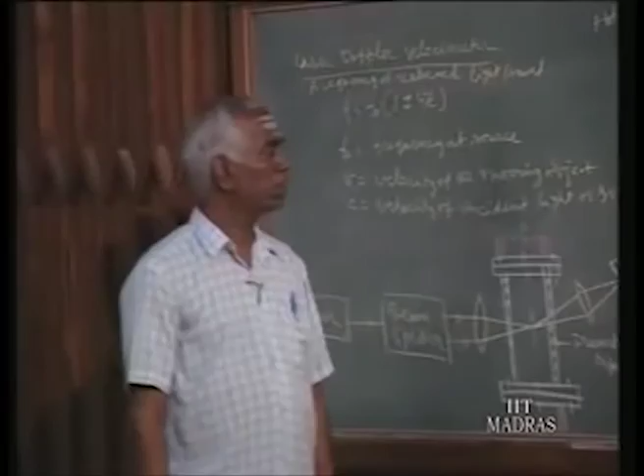Yesterday we saw the hot wire anemometers in 3 modes of operations: constant current mode of operation. This is a hot wire anemometer where we have this wire here. This is the wire of few microns diameter, taken inside, with connections given inside. This wire is used to sense the flow.

We saw 3 modes of operation. One is constant current mode of operation, constant temperature mode of operation, and another one is automatic adjustment with automatic control, that is with feedback. This is what we saw yesterday.

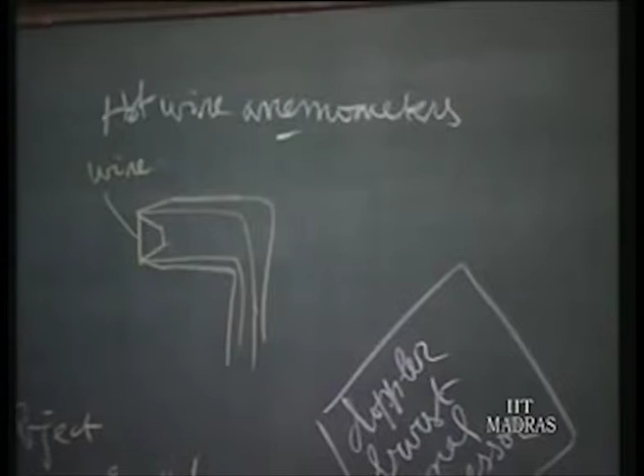In maintaining such hot wire anemometers, one is supposed to clean this wire periodically. Otherwise, what will happen? The dust carried by the flue gas will get deposited, and we will find the heat transfer coefficient H affected. We saw yesterday the equation I squared RW is equal to H into A into TW minus TG.

That is the heat transfer equation. That factor H is affected if you allow the dust to accumulate on the wire. So what is to be done is it should be cleaned periodically so that the calibration curve is valid. We also saw the calibration curves.

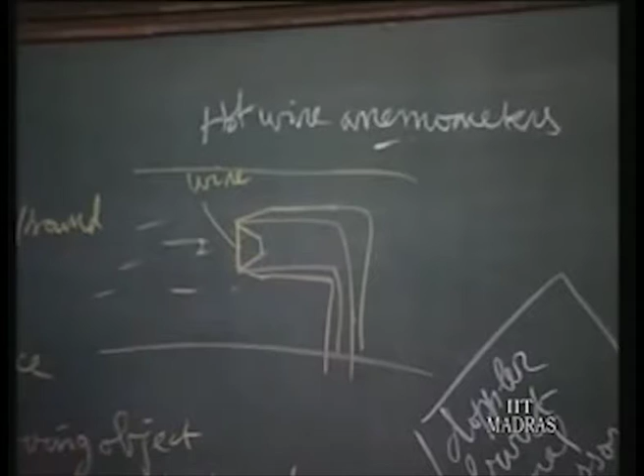In doing so, since the wire is so thin and short in length, it may break while we handle it. Or if the gas flow in the pipe contains some hard particles, due to high velocity, when the hard particle hits the wire it may also break.

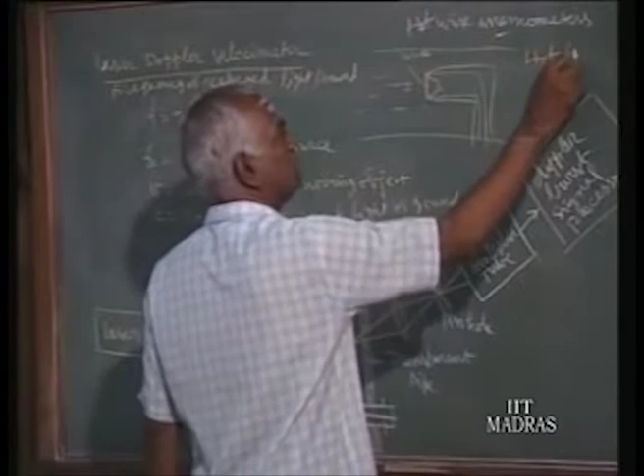So in order to avoid this problem, what is done is people nowadays use a hot film anemometer instead of a hot wire anemometer.

Here they take a wedge type glass, made up of glass support. Instead of keeping a wire, they paste on both sides. This is a wedge type, and they paste the wire material, depositing the wire material on both sides of the wedge, and then take the wire.

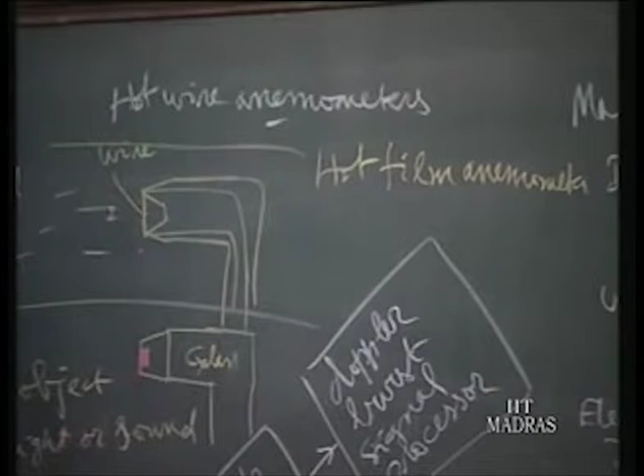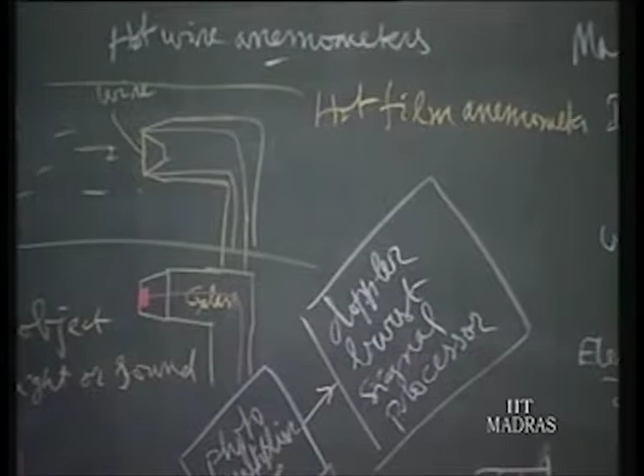This is a front surface, and from the back surface another wire will be taken. So now it's a hot film anemometer - instead of wire, we are using hot film. Now it is supported on the face of the glass support, so naturally the breakage is eliminated. This is the advantage of hot film anemometer over hot wire anemometer.

So now we pass on to the next method, that is the laser Doppler velocimeter. Here one can use either sound or light. The principle is making use of the Doppler effect.

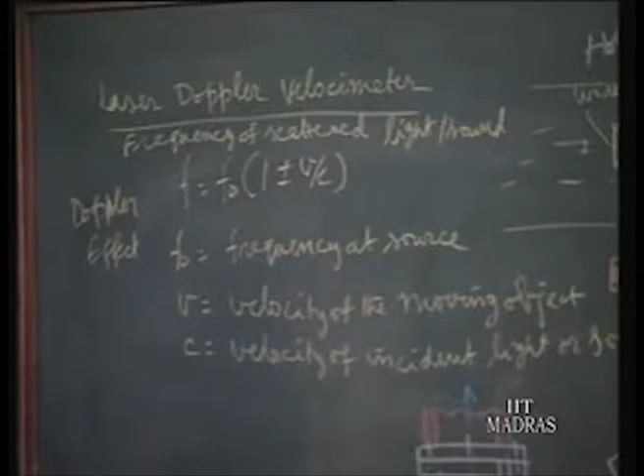What is Doppler effect? Doppler effect states the scattered light from any moving body contains the information about the velocity of the body. So that scattered frequency will be different from that at the source. That is the Doppler effect - the scattered beam contains information of the velocity, expressed in terms of the equation for frequency of scattered light or sound.

We can also use either sound or light for this measurement. So f, the scattered frequency, is equal to f0, the frequency at source, times 1 plus or minus v by c, where v is the velocity of the moving object and c is the velocity of the incident light or sound, whatever we are making use of in a particular instrumentation.

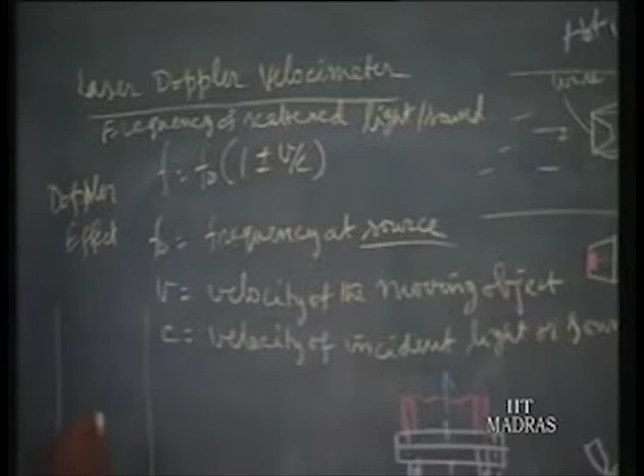We use plus when the object is moving towards the source. This is the source from where we send a beam. So if the object is moving towards the source, we use plus, and when the object is moving away from the source, we use minus. For example, this Doppler effect is used for identifying racing cars.

Suppose the police officer is standing here and he sends a light source or laser beam and collects it back. So this is going away from the source. By collecting this reflected light or laser, he will find out what is the speed, whether it is more than the allowed speed on the road.

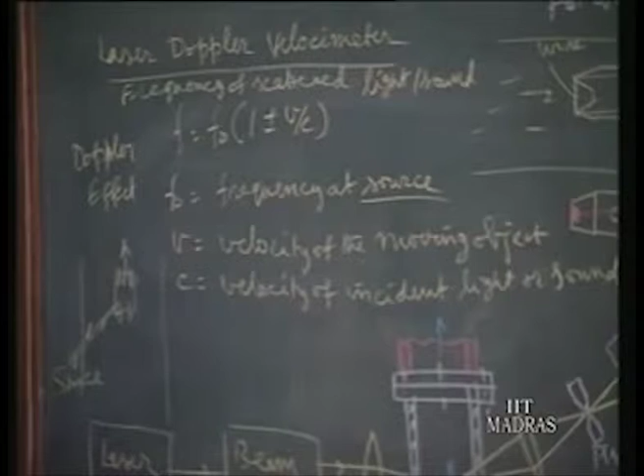That is, the Doppler effect is used by the traffic police officers to locate the racing cars or the overspeeding cars or vehicles.

Same principle here: it is because the moving vehicle's velocity is being obtained. Similarly here, v is the velocity of the moving object.

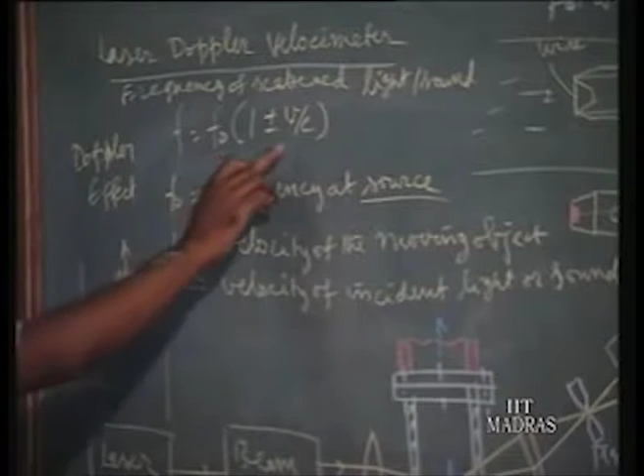In any gas flow or fluid flow, that flow contains some foreign particles, and we assume that the foreign particle moves with the same velocity as the fluid.

Under that situation, we send a laser beam through a beam splitter, splitting it into two, and with the help of a lens we converge it within the diameter of the pipe. Where it converges, there may be a particle flowing with the same velocity as the gas, so it scatters the light.

This scattered light is collected by another lens, the objective lens, and through a pinhole we can control the intensity. Then it goes to the photomultiplier tube where the light is transduced into voltage. That voltage contains the information of the velocity of the object.

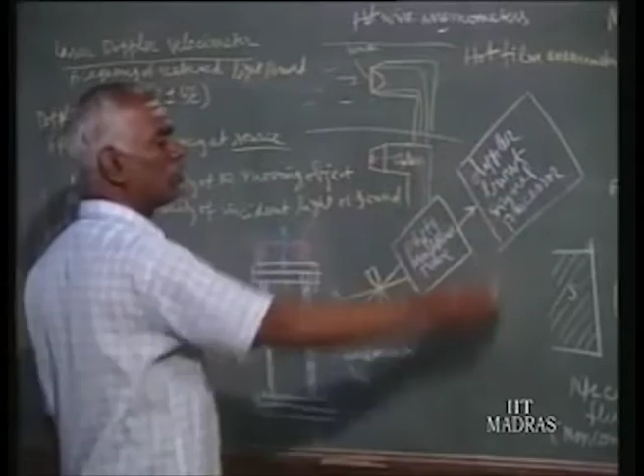It's an electronic circuit from which, according to this equation, you extract information proportional to v, which is depicted as the velocity of the fluid. That is the principle of this laser Doppler velocimeter.

By focusing at different points, we can find the velocity of the fluid, then plot that velocity profile. The average velocity multiplied by the area gives the flow rate. That is how the laser Doppler velocimeter is made use of.

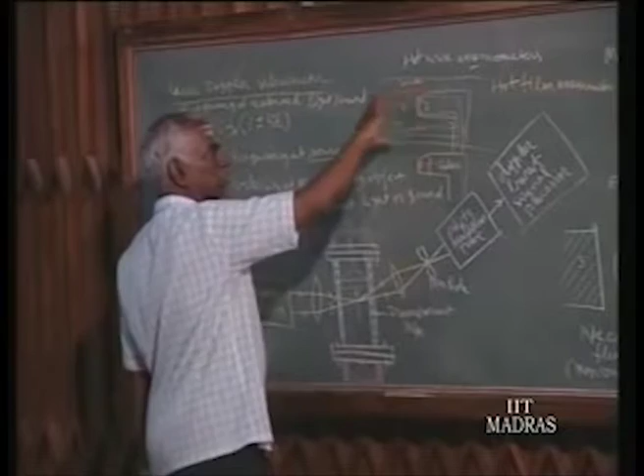It has one main difference. Now compare this with the pitot tube and hot wire or hot film anemometer. There the flow is obstructed - you have only less area available, since total area minus the instrument's area is what remains. The flow pattern is disturbed by inserting the pitot tube or hot wire anemometer.

That disturbance is not there in the case of the laser Doppler velocimeter. It is undisturbed flow - without disturbing the flow, we are making the measurements. That is the main advantage of this laser Doppler velocimeter.

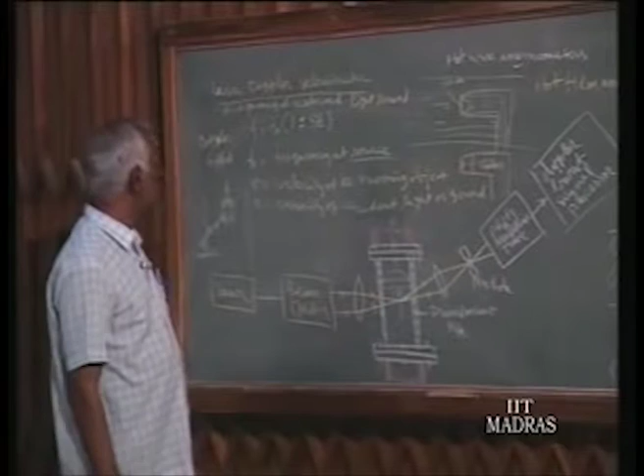In aeronautics laboratories, many places use this laser velocimeter to find the velocity of air particles in a channel, in a conduit.

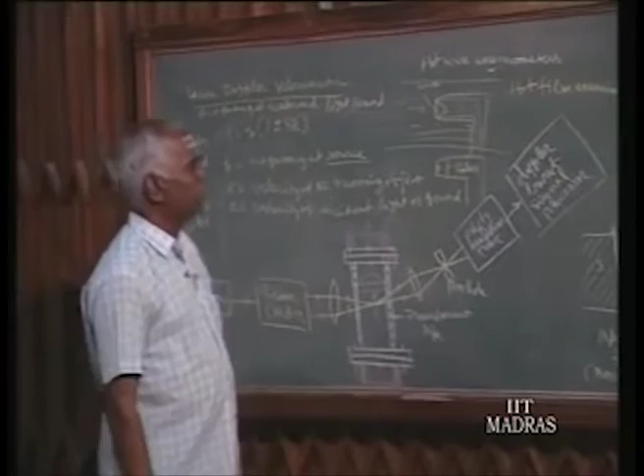Next we go to the magnetic flow meter. One such magnetic flow meter principle, the sketch is given here. This is a magnetic flow meter.

It contains a pipe made up of non-conducting material, carrying the fluid. Here it can be slurries or liquid containing sediments also, because there are no obstructions. So slurry flow rate also can be measured using this. That is the main advantage of the magnetic flow meter.

We have the non-magnetic pipe carrying the liquid in a direction perpendicular to the board, and by two electrodes we pick up the voltage developed in the fluid, which is placed across the north and south poles of a permanent magnet. So magnetic lines are flowing in this direction.

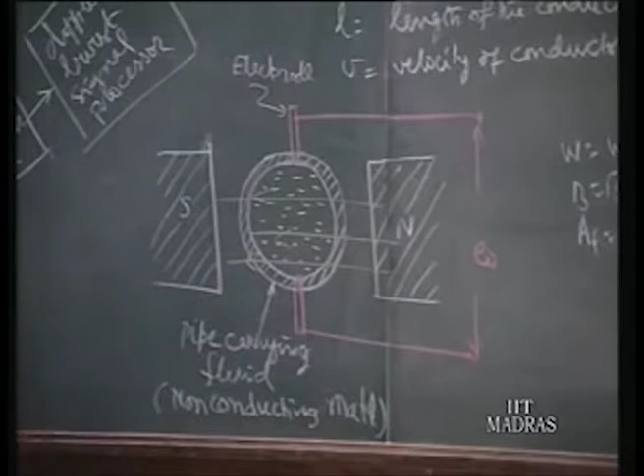That is Faraday's principle: the magnetic lines are in one direction, the flow is perpendicular to the board, and the electrodes' direction is perpendicular to both of them.

If we call this the y direction, this will be the x direction for magnetic lines, and the z direction is perpendicular to both. These represent the flow, the velocity of the conducting material.

The diameter of this pipe represents the length of the conducting material. Each small strip can be considered as strips, so it flows in this direction. The flowing direction is perpendicular, in the z direction; magnetic lines are in the x direction, and the voltage developed is in the y direction.

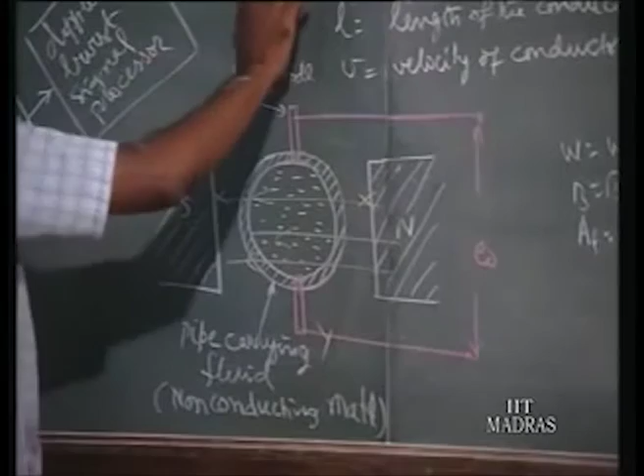So we have this equation: induced voltage E0, picked up at the electrodes, equals B into L into V, where B is the magnetic flux density in Tesla, L is the length of the conductor in meters, and V is the velocity of the conductor, that is the flowing speed, in meters per second.

So the problem here is it's not a conventional conductor wire - the whole diameter is considered as the wire length, as the wire is in terms of a disc, it moves. So the developed voltage is picked up here.

So proportional to velocity we have got output voltage, and the output voltage can be calibrated by sending known voltages, known velocities, and later on unknown velocities can be found out from this voltage developed between the electrodes.

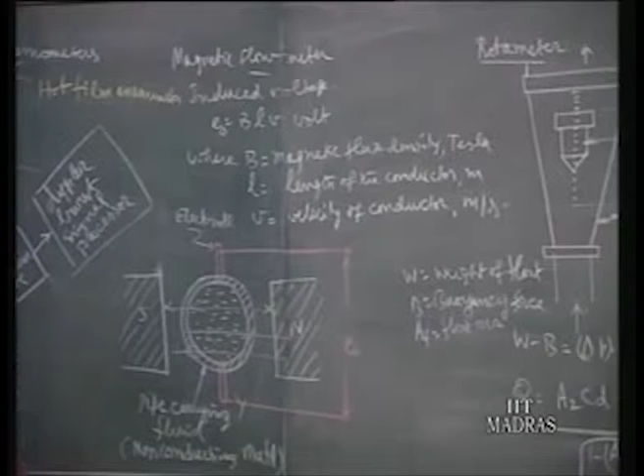When the liquid that flows is non-conductive, like water, the amount of voltage developed is very small. If you use a DC amplifier to amplify this voltage, a drift problem will come. To avoid that, instead of a permanent magnet, they put an electromagnet of varying frequency. Then the voltage developed will also be at varying frequency, and that can be amplified suitably in an AC amplifier.

Suppose it is a conducting material, like liquid metals, then we don't even require that - the DC voltage itself is sufficiently large, and we can measure it with an ordinary DC voltmeter.

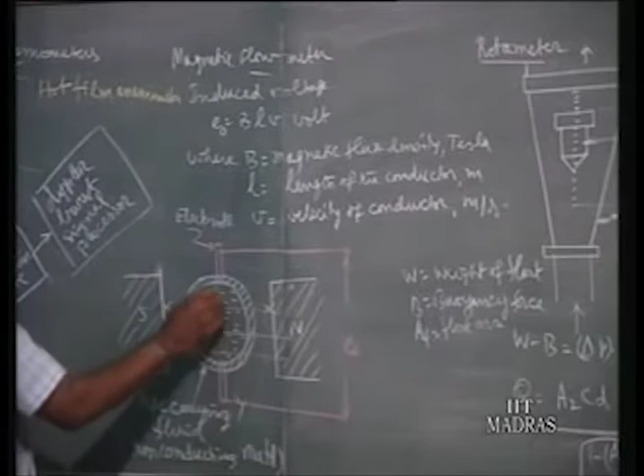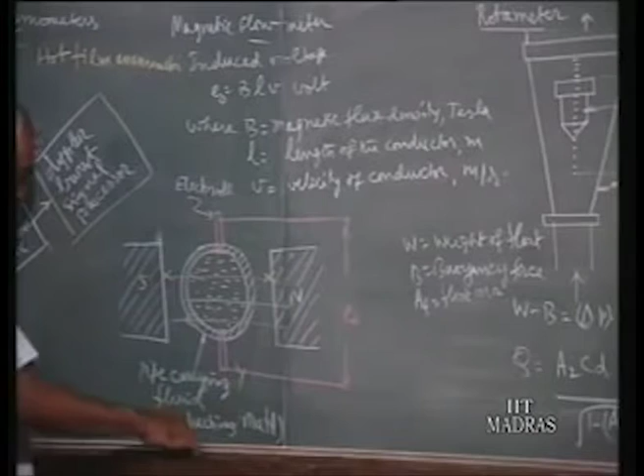It is to be noted, since it is a non-conducting material, the electrode goes into the body and touches the liquid at the surface, then only the voltage can be picked up. So this is the principle of the magnetic flow meter. Next we go to the rotameter.

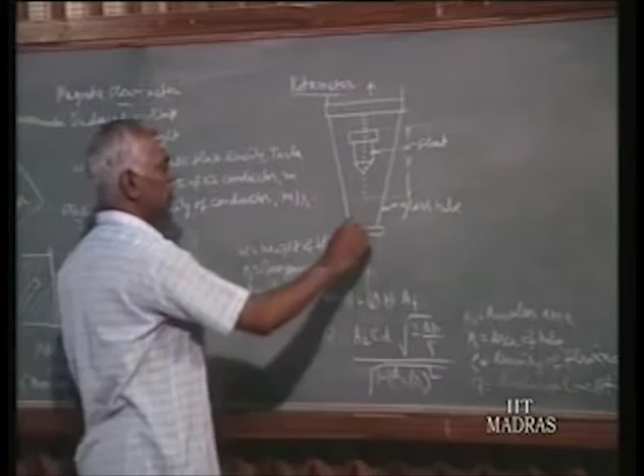The method of functioning is: due to flow, the float rises. When flow is there, it rises to different heights at different flow rates, and where it stops, a measurement is taken - that scale reading is written there, and that scale reading can be calibrated in terms of flow rate. This is the way it is made use of.

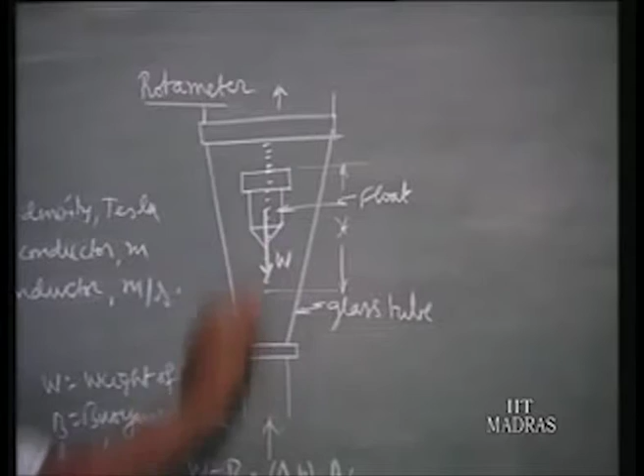The principle of functioning is: assuming the float is at some height, let W be the weight of the float, and buoyancy force equal to the volume of the float times the specific weight of the liquid that flows. Weight minus buoyancy force is balanced by delta P, the pressure drop across this float, times AF, the projected area of the float - that will be the net balancing force. The remaining weight is taken up by delta P times AF - that is the equation for equilibrium.

Now for any given float or liquid, W is constant, B is constant, AF is constant for a given float and given liquid. So when everything is constant, delta P should be constant.

But at the same time, the equation for flow rate Q through this rotameter is given in terms of A2, the annular space through which flow takes place. CD is the coefficient of discharge, delta P is the pressure drop across the float, rho is the mass density of the flowing medium, and A1 is the pipe inlet area. So in this, if delta P is to be constant, whenever Q varies - considering A2 by A1 too small to neglect, and with Cd as a constant -

you find Q is proportional to A2. Since delta P should be constant, when Q varies, A2 has to vary. That is the reason why for different flow rates it rises - so that a larger area is allowed for the flow rate. As it rises, the area increases at a linear rate.

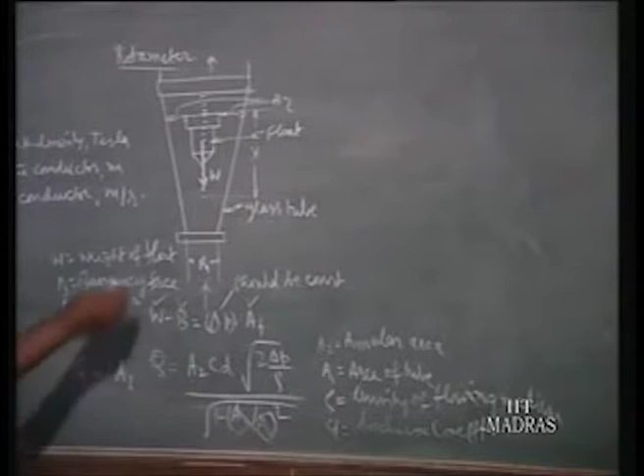As the area increases as the float rises, in a linear relation - this linear relation is obtained by some parabolic curve, because if it were conical, the area would no longer be proportionate to the lift. So some parabolic, some quadratic function is needed to shape the profile. Hence you get area proportional to the lift.

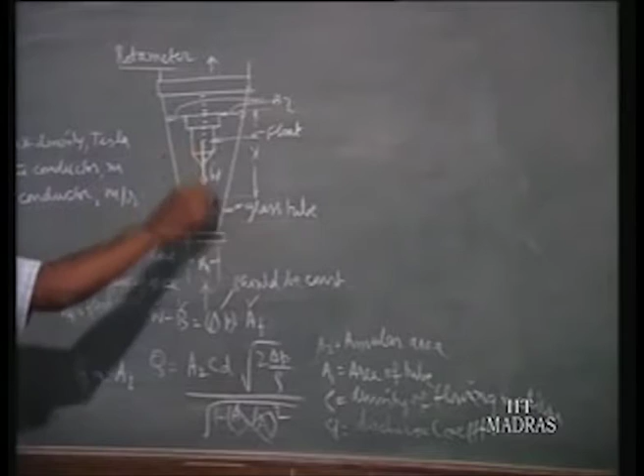So you find Q is proportional to lift also. That is why we get a linear scale indicating the flow rate. So that is the way the rotameter functions - it gives a linear scale, and as the flow changes, we measure the height. Depending upon the different densities of the fluid liquid, the manufacturer gives different shapes for the float, and accordingly we have to use it, as specified by the manufacturer.

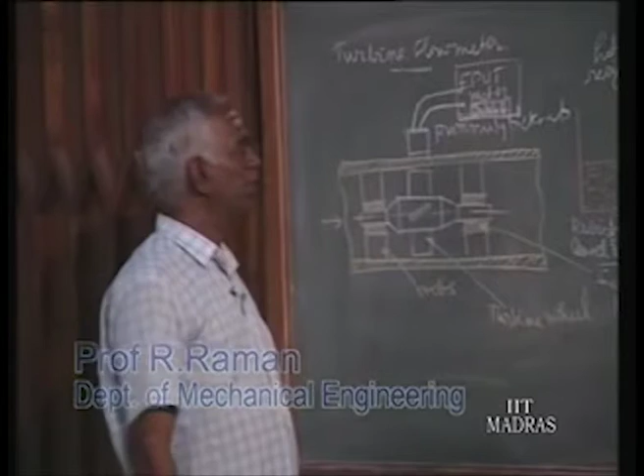Before we pass on to level measurement, we see one more method for flow measurement, called the turbine flow meter. This is domestically used in almost all houses where water consumption is to be charged. If it is to be charged, normally people go for this type of turbine type flow meter.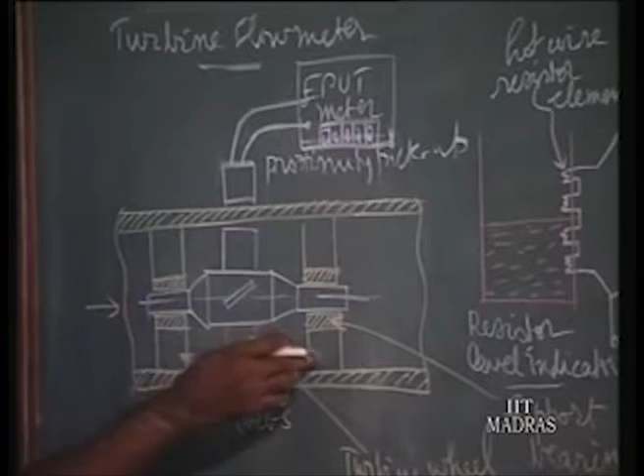In the pipeline you insert a turbine. Here the turbine wheel is shown with bearing and webs. These webs, radially probably three, diametrically schematically shown here—3 or 4 webs may be there, and between the webs it will be flowing, but the bearing is continuous, so it's a cylindrical piece. That's how it is mounted.

So you have got the turbine wheel blade made up of magnetic material.

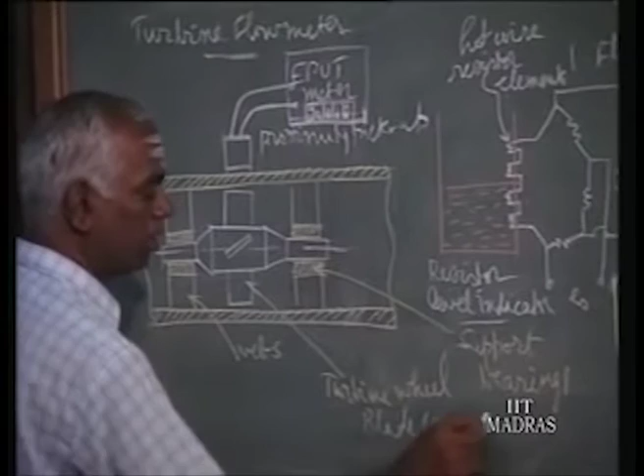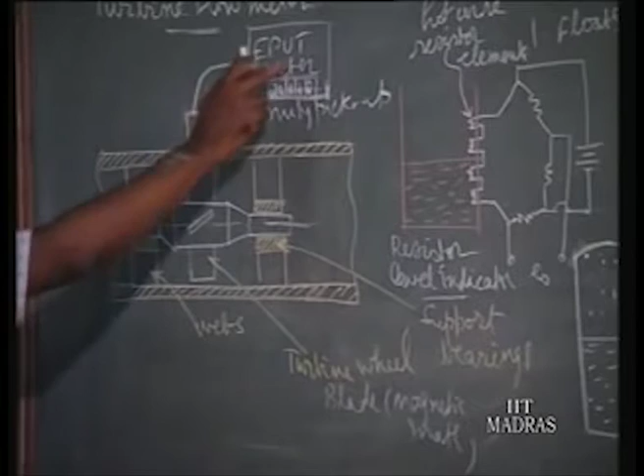Whenever a blade comes near, this proximity pickup can be positioned outside the pipe carrying the liquid or water, and whenever a blade comes, this proximity pickup will give one pulse. Such pulses are counted in an EPUT meter, events per unit time, per second, per minute or per hour—you can select. So many pulses per second, that is proportional to the flow rate. The counting rate, the pulse rate, is proportional to the flow rate.

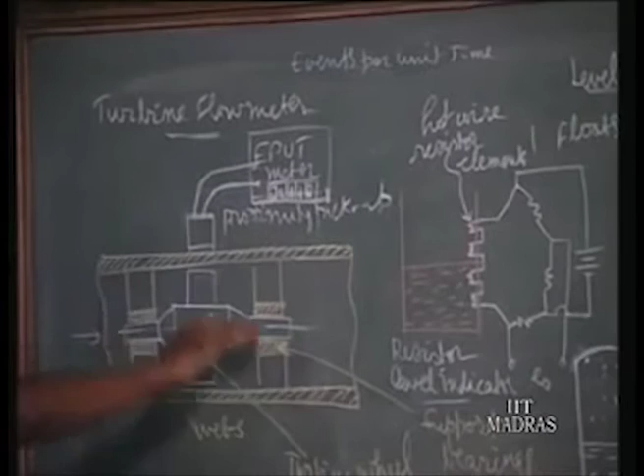When we want to find out the total flow in a given duration, you start the flow, and at the end of the duration, the total reading or total pulses represents the total flow. Total number of pulses represents total flow, and the pulse rate per second, per minute or per hour represents the flow rate respectively.

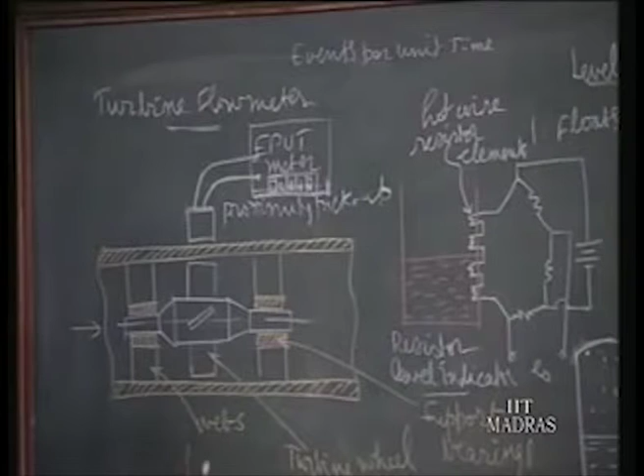That is the principle. Whenever it rotates to that extent, if d theta is the angular rotation, that represents a small differential flow dq. Then d theta by dt is the same as dq by dt, that is the counting rate. The pulse rate d theta by dt is given by the pulse rate. So this is the principle.

If you don't have this proximity pickup, you can also go for a purely mechanical counter. Suppose this is a rod extended, and you connect a set of bevel gears and bring it out with a suitable sealing, and let it be counted here. This is the mechanical counter—a bevel gear unit connected to the axis of the turbine. The rotation is brought outside by a set of bevel gears, and the second bevel gear axis is connected to a mechanical counter. So here you can take the reading.

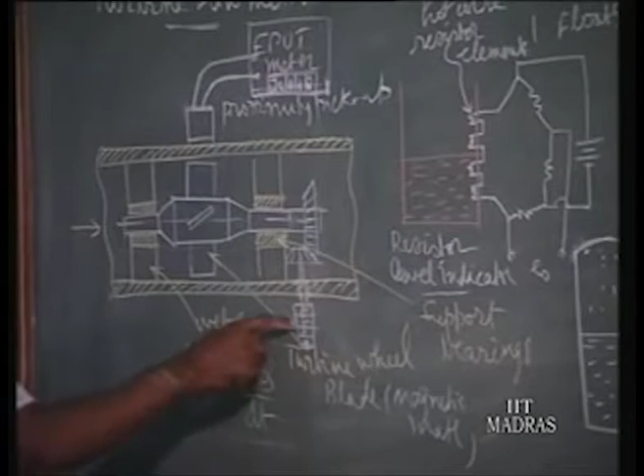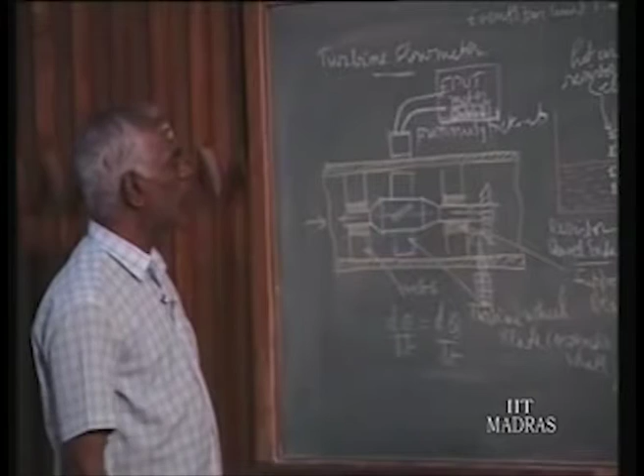This is what is used normally in houses—you will have the mechanical counter. The person will come and take one reading at the beginning of the month, and one at the end of the month. The difference between the two readings represents so many liters or so many gallons per month. That is how it is used for total flow or flow rate measurements. So from the rotating speed, from the counter, we can also find out the flow rate.

With this we close flow measurements. Next we pass on to the last chapter in our topic of mechanical measurement, that is level measurement.

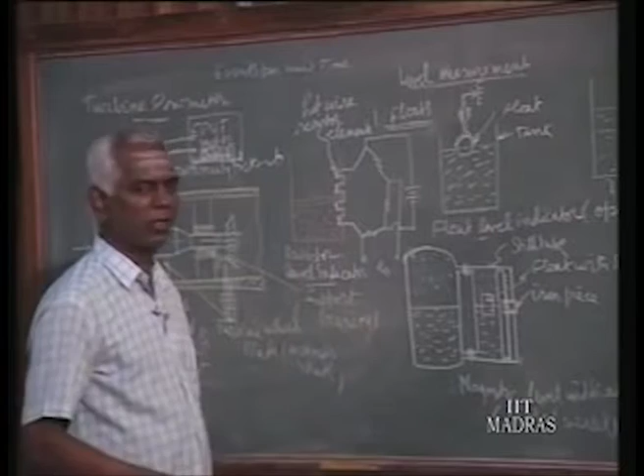The first and foremost method is using floats. Floats are often used to sense the level of a liquid. Also, in almost all houses we have water tanks, and the water in the tank is invariably sensed by having a float there. If the level is full, this motion of the float is made use of to close the valve, through linkages.

Suppose you want an electrical signal, or just want to make a reading—you have a scale, and the float end is connected to an extension rod; that rod end moves over the scale, and you can just make readings of so many meters of water height. Or you can also connect it to a resistance potentiometer, converting this level into a suitable electrical signal.

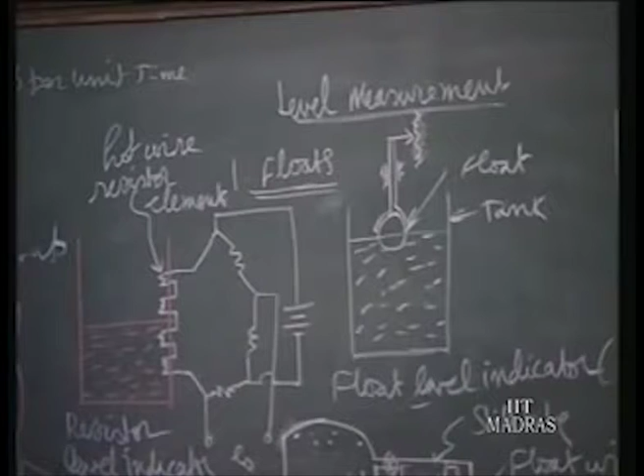You process it and take it to a control room. In process industries, the tank may be some distance inside the factory, so that signal is brought to the control room, and the operator knows at any instant what the level is in that particular tank.

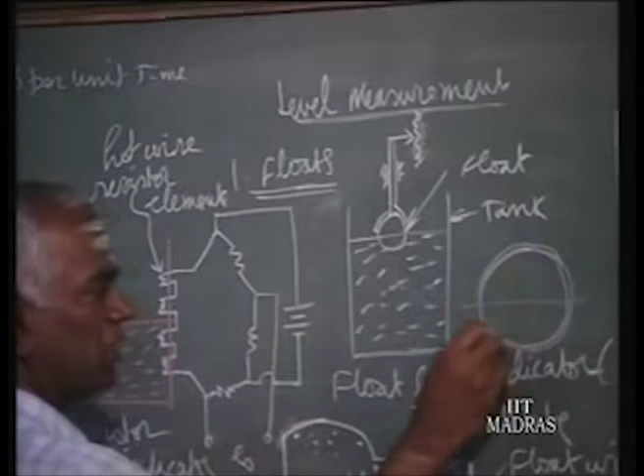So float is the convenient mechanism, it is a hollow plastic sphere. When it immerses, its weight is very small, and even small immersion is sufficient to support this weight. Any further rise pushes this float up. If you try to push this float down, you'll find a lot of force is there. That force is more than sufficient to actuate a valve and close the water inlet into the tank in case the tank is full. That is a very convenient mechanism.

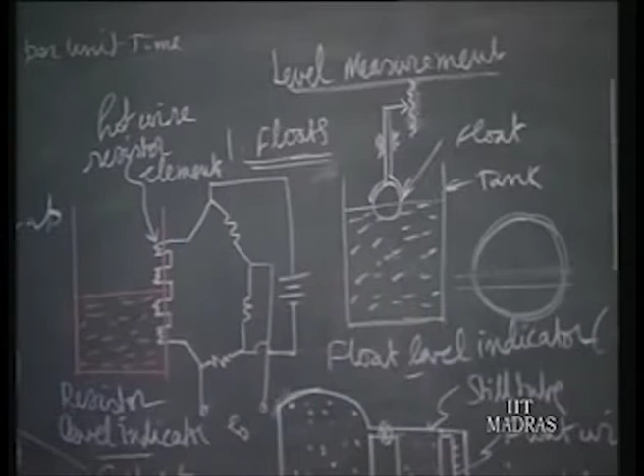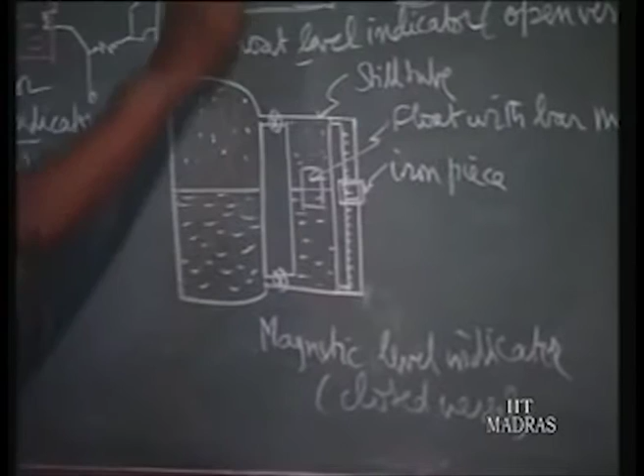That is more or less used in open vessels, these types of floats. Suppose we have a closed vessel just like a boiler for steam engines, or in power plants we have boilers. If you don't have free surface to atmosphere like this, we find immediately above the liquid level we have steam at very high pressures. So in such situations this type of float is not useful, but if it is medium pressure we can go for a sight glass.

It is called sight glass. We can connect a glass tube to the tank so that the water level can be seen from outside. It is only for low and medium pressure of this vapor. If it is high pressure, then glass may not withstand.

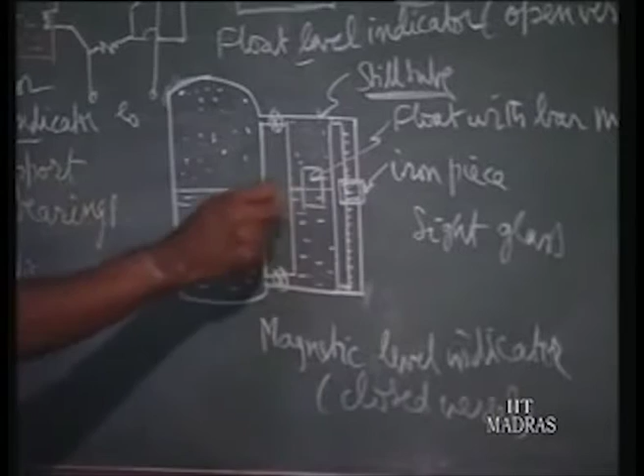Then we go for the metallic tube connected to the main tank. It is called a still tube, made up of metal. Then we don't see it directly, since it is opaque, we do not see the level.

Then we make use of a float with a bar magnet. Some bar magnet will be there as part of the float. So as the float rises, the bar magnet also rises along with the float, and nearby we have an iron piece guided by a round piece where a scale is also marked. So as the float rises, the magnet will pull the iron piece also to indicate the level.

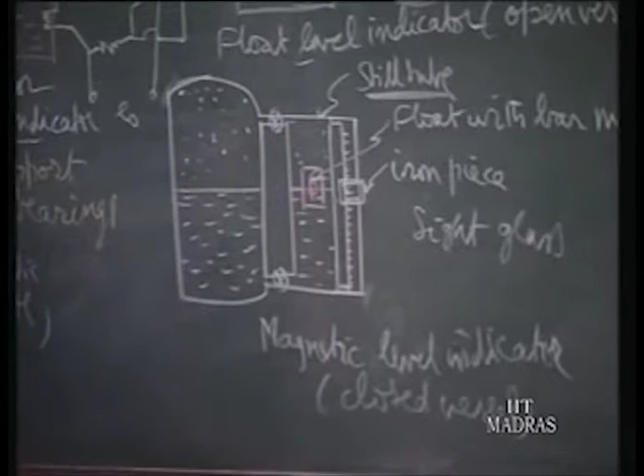So wherever the float is there, the magnet attracts the iron piece and adjusts this level. As the float rises and goes down, the iron piece also goes down and up along with the magnet. So from outside we can see where the iron piece is, and that is the level of the liquid there. So this is how in closed vessels level is sensed or seen from outside.

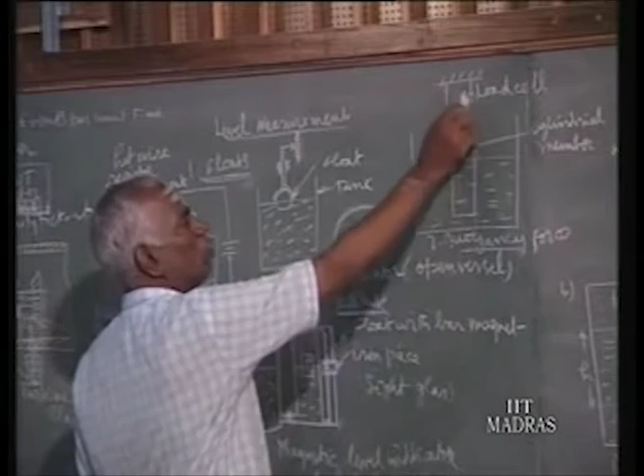Another method is by using buoyancy force. Suppose we have a cylindrical member like that, and there is no liquid in this column, no liquid in the tank. Then we find the load cell will give the total weight of it. It can be hollow and made up of any metal, a metallic hollow cylinder. So the cylinder weight will be indicated by this instrument, the load cell, and you will mark it as 0 level because full force is there.

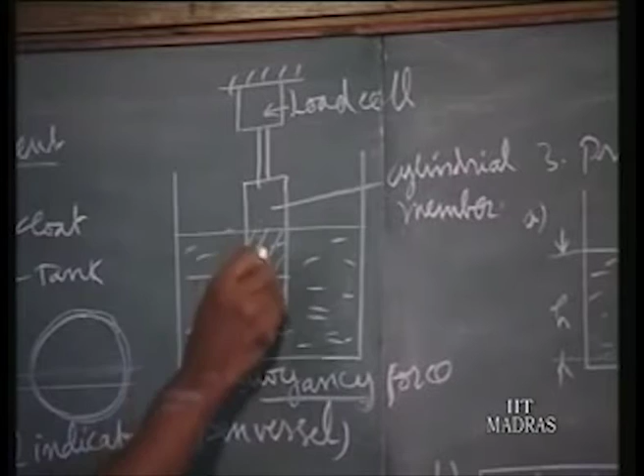But as the level increases, we find the immersed volume times the specific weight of the liquid is the buoyancy force. So if W is the weight of the cylinder, minus buoyancy force will be the reading here, the load cell reading. So W minus FB is our reading for the load cell. That will be calibrated having known level, and later unknown levels can be read from the load cell. So the load cell reading can be calibrated in terms of the level here, because buoyancy force is a function of the level. So W minus FB will be a function of level where W is a constant. That is how we use the buoyancy force to sense the level.

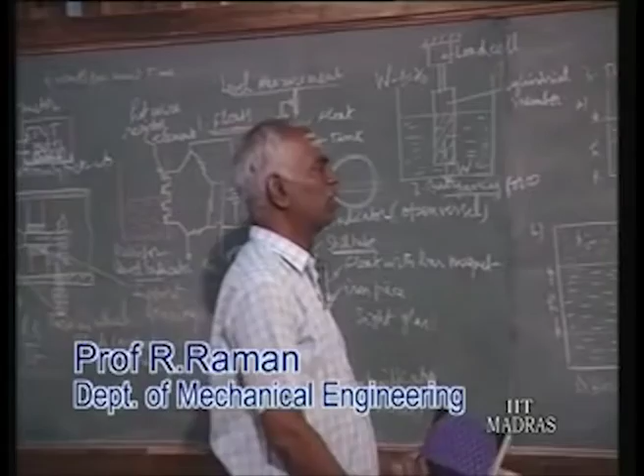Then we know when there is a liquid column, the pressure at the bottom is a function of the column weight. This is a well known principle. By using that we have got some designs based on pressures, using pressure sensing in different ways. Under different situations we can also sense the level of the liquid. One way is at the bottom of the vessel we connect a pressure gauge. So we know the pressure indicated in the pressure gauge is a function of height and the specific weight of the liquid, W into height. So for a given liquid W is constant, so P is proportional to height.

So the reading in the pressure gauge is calibrated in terms of the height of the column, the height of the liquid in the tank. This is the obvious method.

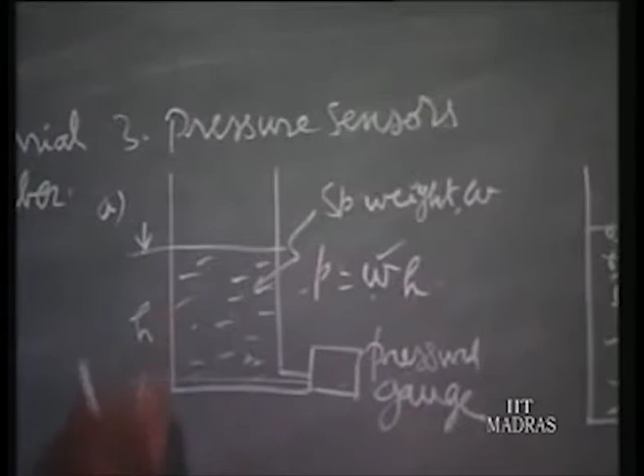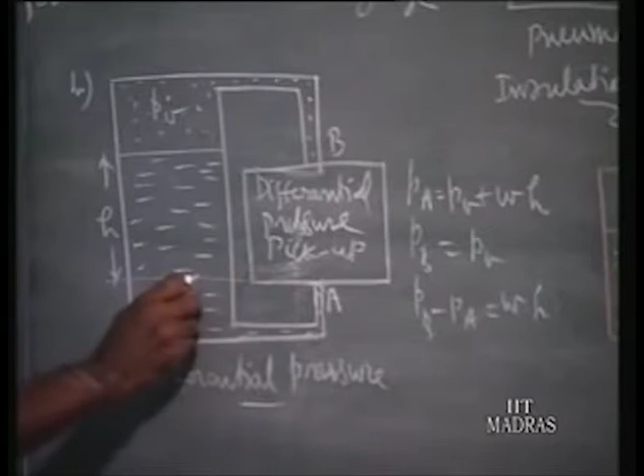In a closed vessel we go for the differential pressure pickup. We have the vapor of the liquid above the liquid. So the vapor pressure is taken as one of the input pressures to the differential pressure pickup, and the bottom point, as near the bottom as possible, is point A. So total pressure at A, that is PA, equals the liquid column plus vapor pressure.

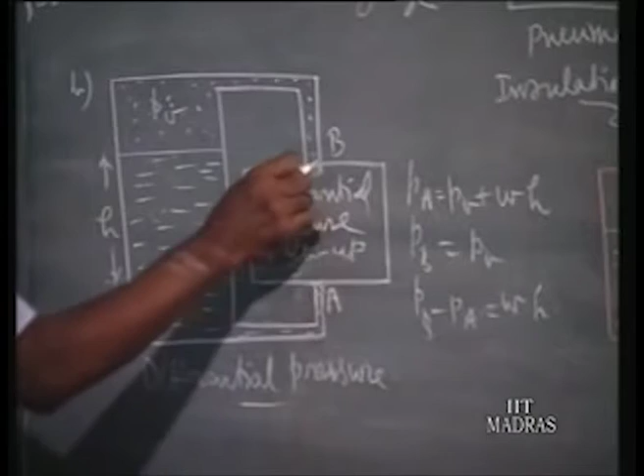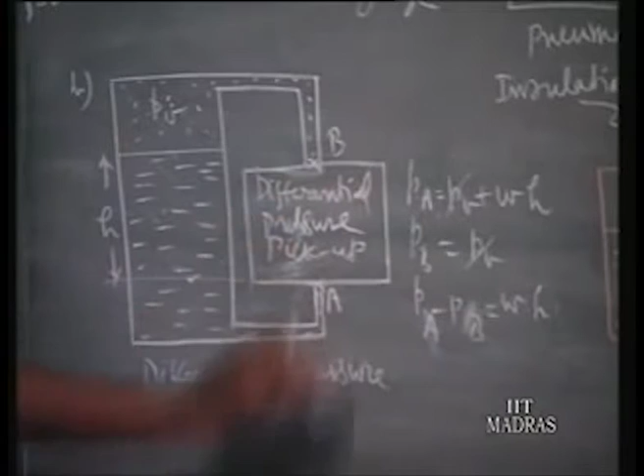So PA equals PV, the vapor pressure, plus W into H, where W is the specific weight of the liquid. Whereas PB, at this point, the vapor pressure will be there. So PA minus PB, that is the reading proportionate to the differential pressure pickup, equals WH. PA is larger, so PA minus PB equals WH, where W is constant for any given liquid at a given temperature. So the reading is proportional to H. The reading of the differential pressure pickup will be in terms of H, and later on we can use the reading for any unknown H. This is the second way of using the pressure reading.

Third way is using the pneumatic principle, which we call the flapper nozzle system. I explained this earlier, the flapper nozzle system.

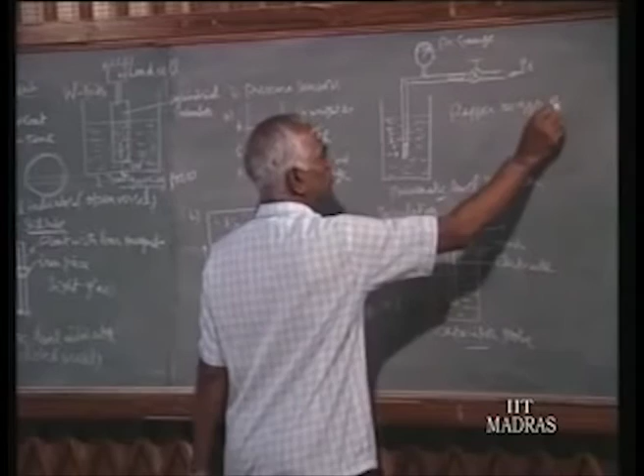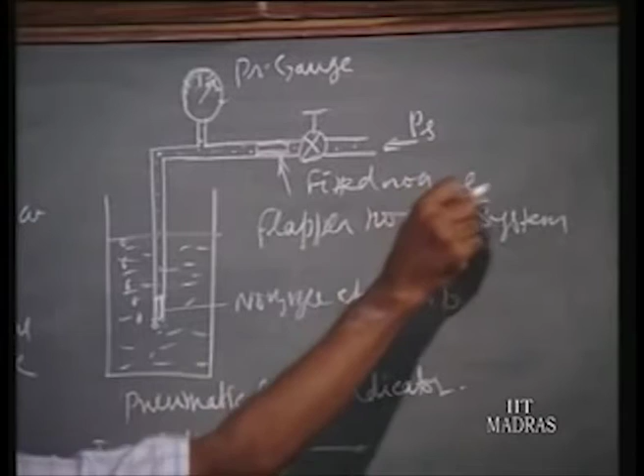That is what is made. The flapper nozzle system consists of two nozzles. This is one nozzle here, the nozzle at the tip, and this is another nozzle, the fixed nozzle. As per the flapper nozzle principle, the pressure in between the two nozzles is called the chamber, the space between the two nozzles. The chamber pressure depends upon the resistance to flow at the nozzle at the tip. That is the principle, an application of the flapper nozzle system.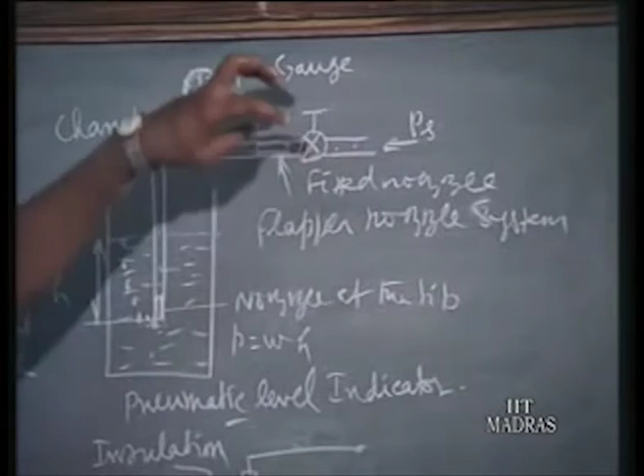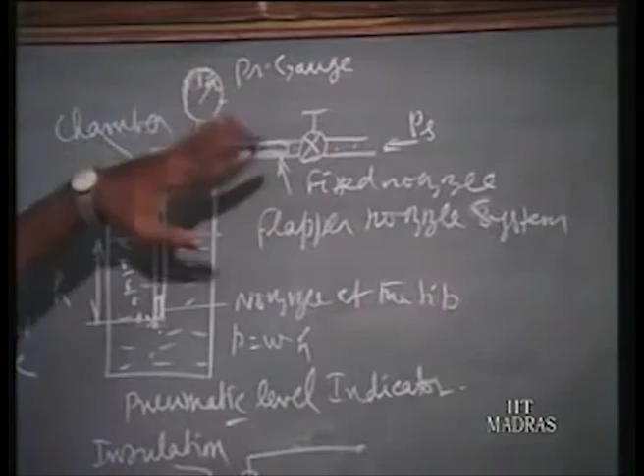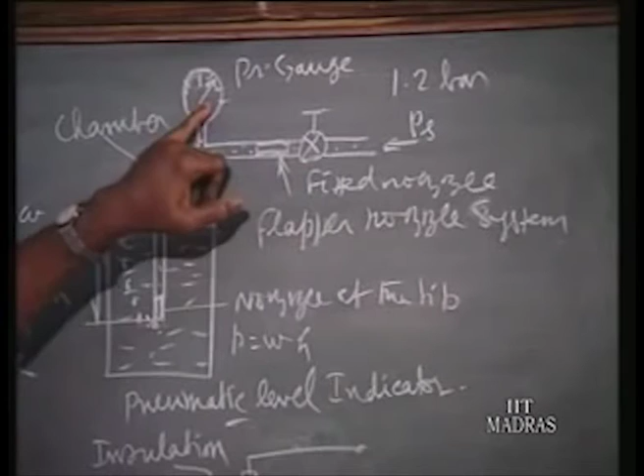So at this point, whatever the pressure is, if H is the height, then pressure P equals W into H. That is the pressure. If the chamber pressure is just above the liquid pressure at this tip, then the gas will escape in terms of bubbles. So until you notice bubbles, adjust the supply pressure with the valve, just rotate it. So higher and higher pressure will be allowed, and the pressure in the chamber, through the fixed nozzle, the gas or air will be entering - pneumatic air we can use, say preferably 1.2 bar pressure gauge - you can adjust it so different pressures can be allowed. When the pressure builds to the extent of the pressure due to this column, it will start bubbling; at that time stop adjusting it and note down the chamber pressure in the pressure gauge, and you can calibrate that in terms of the known height. Later on any unknown height can be read on this scale. So the pressure gauge will be calibrated in terms of the height of the liquid above the tip of the nozzle.

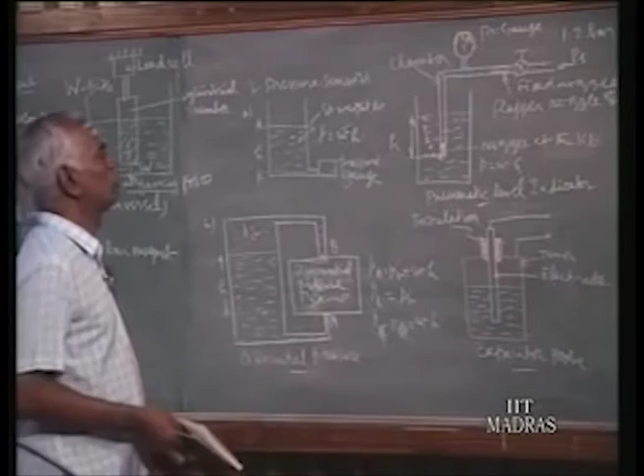So these are the three ways in which the pressure of the liquid column can be made use of to sense the level of the liquid. The other one is the capacitor. Any liquid, solid, or powder material will have its own dielectric constant.

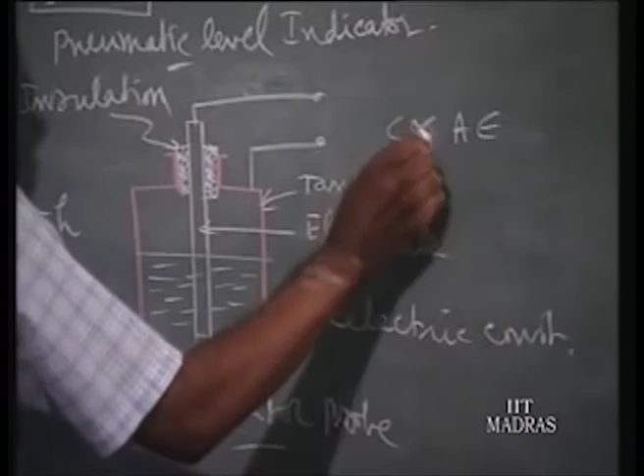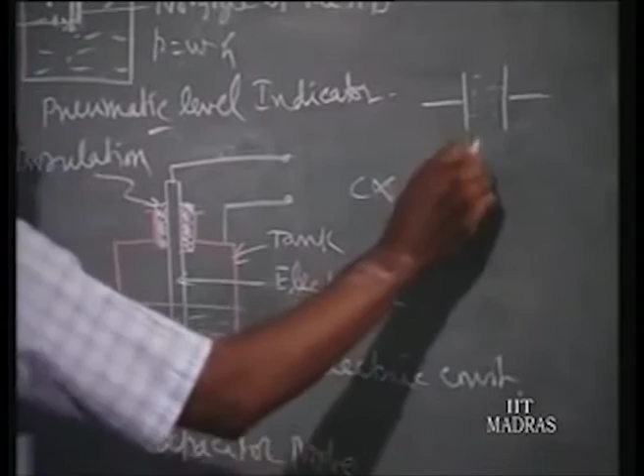It is called the dielectric constant. So we know in a capacitor, capacitance equals area into... it is proportional to the area of the two parallel plates, the dielectric constant of the material, divided by d, which is the distance between the plates. We know capacitance is a function of all these things. Now here the area and the distance are constants.

The electrode is one plate, and the tank is the second plate of the capacitor. Now when the liquid or powder level is increasing, the dielectric constant is varied. This is what varies. In the two plates, the dielectric medium, which is the level, is changed.

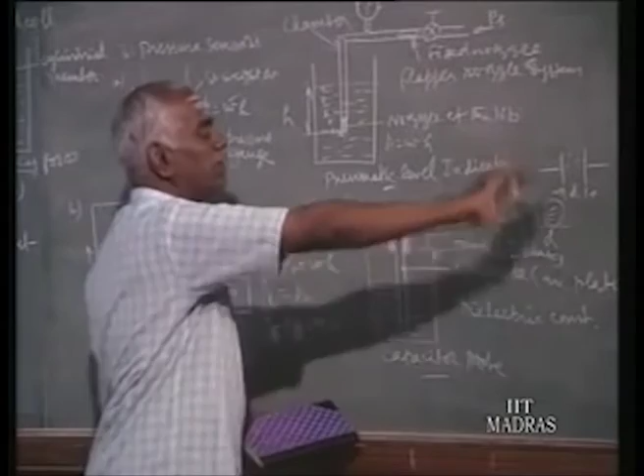Hence you find the dielectric constant for that capacitor made up of this electrode and tank will change, and this will form one capacitor in a simple electronic or electrical circuit. Proportionately you get a signal output from the circuit. So as the level changes, epsilon changes, capacitance changes, and the voltage output in the electric circuit will change.

From that we can get a signal proportional to the level. So to insulate these two plates, we have got insulation. This is one plate, this is another plate, and in between you should have an insulator. In case the liquid or the metal powder is a conducting material, then extend this insulation for the full length of the electrode.

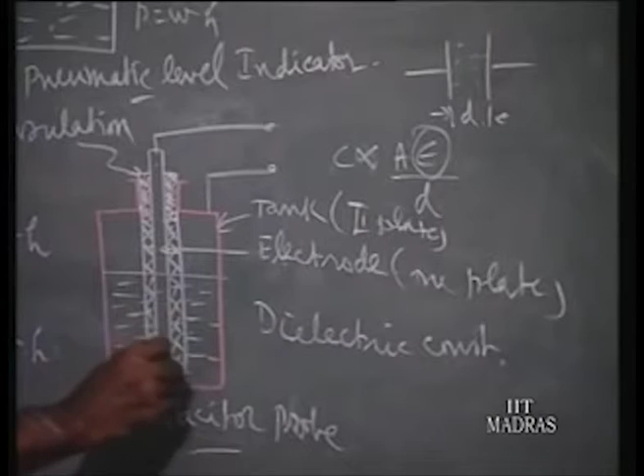If it is a non-conductive material, it is sufficient to insulate only at the top where the electrode and the tank are joined. But if the liquid, gas, or metallic powder stored there is conducting, then extend this insulation throughout the electrode. Then you will again have variation as per the level, the dielectric constant will vary, and you will get the signal. That is the capacitor principle for level measurement of the charge inside the tank.

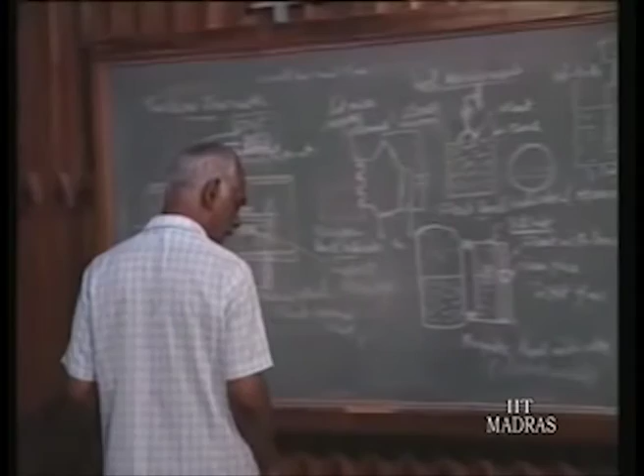The last method shown here is by using hot wire resistor elements. This is mainly used for cryogenic liquids, cryogenic fuel. Suppose in a rocket, at the time of manufacturing the rocket itself, we will have the tank to store the liquid fuel.

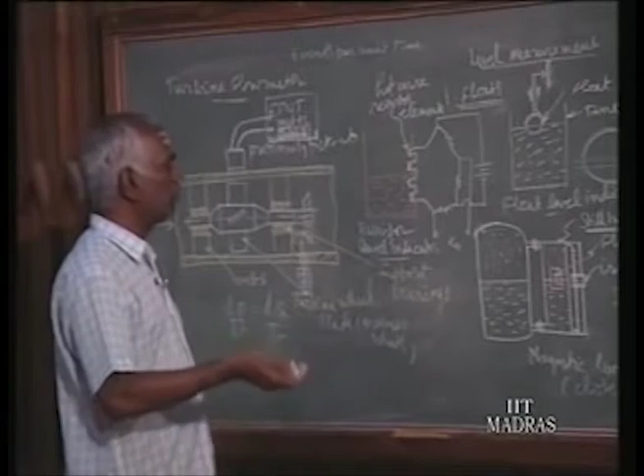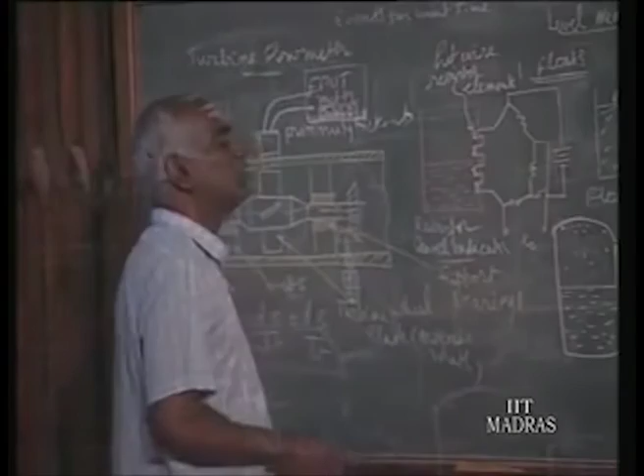In filling the liquid fuel in the tank, we should be noting at different stages of filling what is the level in the tank. To note the level of liquid fuel in such tanks in rockets, people normally go for this hot wire resistance element.

At the wall of the tank you find resistance elements at different heights. This is one element, then a gap, then another element, and so on. It can be as small as possible - every say 1 mm you can embed such resistances. The resistance will be open to the liquid, while the rest will be inside the wall, with only the element exposed to the liquid.

As the liquid level increases, for example at this level two resistances are immersed in the liquid, and especially in cryogenic situations, the moment any element is immersed - previously it was switched on with current flowing through all the embedded resistances forming one arm of the 4-arm bridge or Wheatstone bridge - before filling up, current flows through all these resistor elements.

Due to current flow, they will attain a certain temperature. As soon as any element is immersed, the heat transfer coefficient of that element drastically increases, and a lot of heat is given to the cryogenic liquid, causing that element's resistance to come down. This means if you had previously balanced it without the liquid, the moment one element is immersed, the balance is immediately affected to that extent, and you get an output voltage.

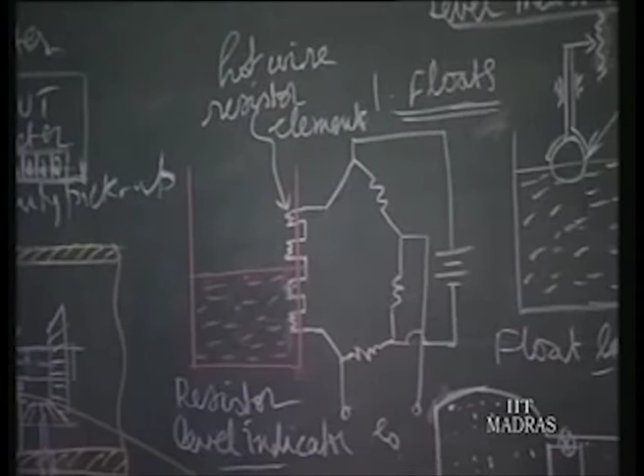Similarly, as the number of elements immersed increases, the effect multiplies approximately that many times. If you assume a linear relation, the output voltage will be proportional to the number of elements immersed. You can calibrate that reading in terms of the level of filling of the liquid fuel, which you always get in terms of the output voltage or imbalance voltage of the bridge.

So this is a bridge, this is one of the arms. If you call it R1, R2, R3, R4, across two terminals you apply the power supply, and from the other two terminals you take the output. This is a typical 4-arm bridge circuit using the hot wire resistance element.

These are a few methods used for level measurement, though there are many other methods. These are the conventional, commonly found methods.